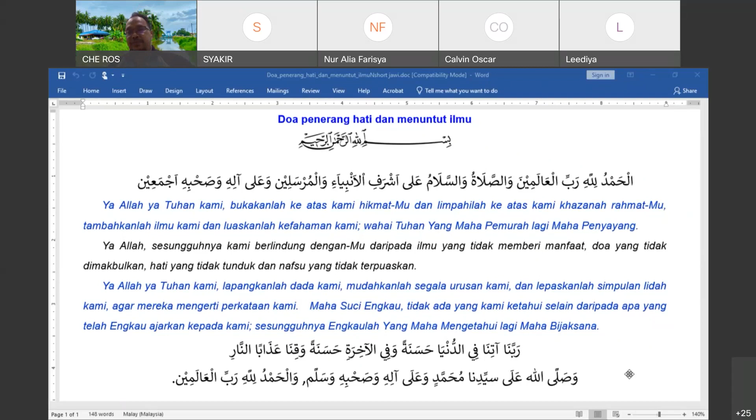Terima kasih, Syakir. Okay, Allah, kita share. Okay,

As usual, three quotations. Any takers? Okay, anybody? I want to take the first quote, Doctor. Naszrin the first, okay. Okay, siapa? Vivienne, I'll take the third quote. Vivienne, third one. Yes. Assalamualaikum, Doctor. Yes. Yeah, I'll take the second quote. Okay, Abdullah, second quote. Okay, go ahead, Naszrin.

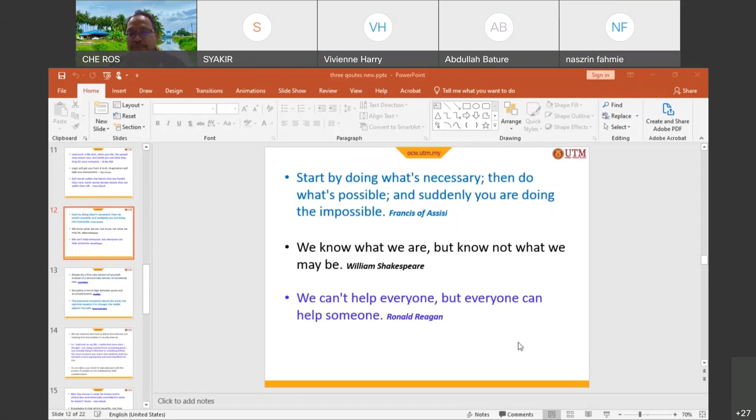Hello, Assalamualaikum. Waalaikumsalam. Okay, so the first quote is: start by doing what's necessary, then do what's possible, and suddenly you are doing the impossible. From my understanding of this quote, if you want to reach a destination, sometimes you don't see your path, but you can see the next step. So in order to reach your destination, just proceed to your next step, and after a while, you'll see that each step that you take leads you into doing something that you thought was impossible. Okay, that's all for me.

Okay, thank you, Naszrin. Okay, next, Abdullah. Okay, Doctor. So my quote is by William Shakespeare. It says, "We know what we are, but know not what we may be." And what I think this quote is trying to say is that we do not know what the future holds. So at a point in time, we may see ourselves to be not where we are supposed to be. Like we haven't reached a goal, or our personality is not what we want it to be, or where we are in life, we feel like we're not there yet.

And the thing is, that's true, because at this moment we only know what we can do, but in the future, we don't know what we are going to be. I think the quote is trying to tell us to always keep a positive mind and have an optimistic mindset for the future, because we never know what the future holds. Only God knows, and good things can always happen. Thank you. Okay, thank you, Abdullah.

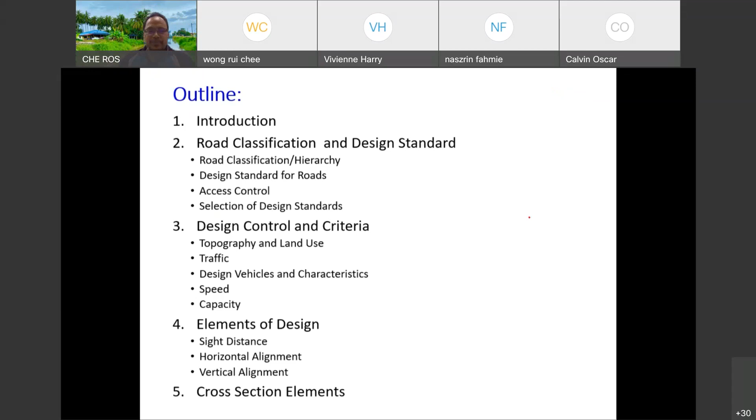Why must we follow the standard code of practice in the design? Why must we have ATJ, arahan teknik jalan, that you have to follow? First, we want everything to be standardized to provide uniformity in the design. Meaning that if you are in Johor, if you are in Pahang, if you are in Perlis, if you are driving on an R4 road, the quality in terms of the lane width, the maximum super elevation, the shoulder width, all these things should be standard.

And then, to provide consistent, safe, and reliable road facilities for traffic movement. Since we set the minimum standard, that minimum standard should already provide us safe and reliable road facilities if you use it properly. For example, if the speed limit is 90 and you are doing 90, then you'll be fine. But if the speed limit is 90 and you are doing 140, then you are taking the risk. You are doing it at your own risk.

And then, to provide a guide for less subjective decisions on road design. So if you have something and you ask, how should I design this? Then you can refer to ATJ, because it will guide you on what to do, what needs to be there, what is the requirement, and then you just follow it.

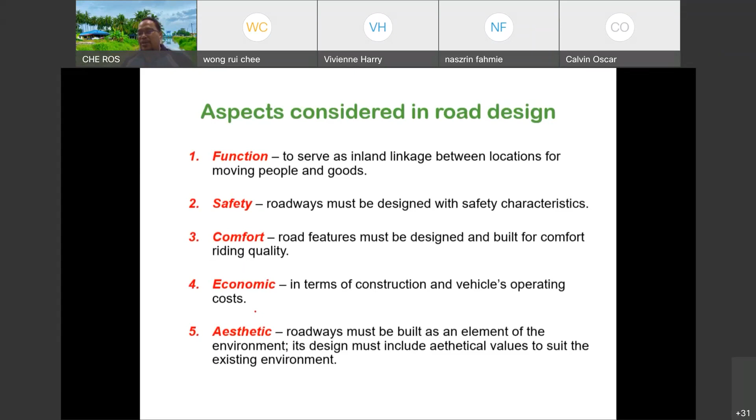And then aesthetic. The road should be pleasant. When you view it, it will be a pleasant view for you. So if you are good in blending the road with the environment, then it will be much better. Even though aesthetic is not so-called a function, if it doesn't look good, nothing happens, but it is going to be much better if it is a pleasant view, so when you drive through it, you enjoy the scenery. I try to do that, because most of our roads cross through forest or uninhabited land. If you design it correctly, nicely, it will be very nice, and your travel is going to be very enjoyable. So keep that in mind when you do the design.

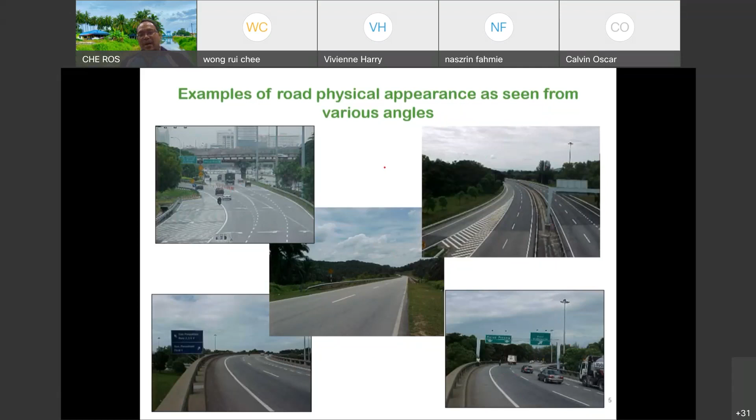Remember, your vehicle emits not just carbon monoxide and everything, it also emits heat. And if it's confined in that tunnel, it's going to be hot. So this is a very nice design for me.

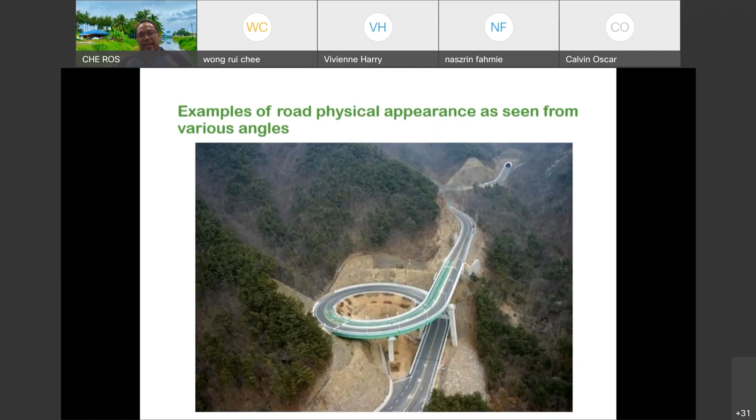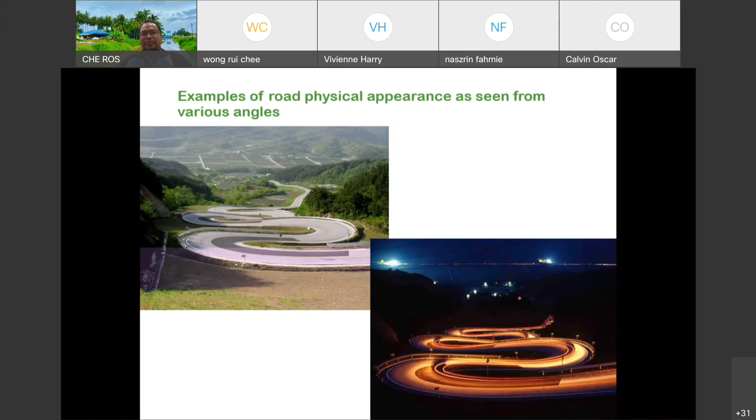In Malaysian JPJ, you have the test on Naik Bukit, where you will be considered failed when your car goes backward. As you can see, this is the snapshot at night - it looks very nice. You can make it good.

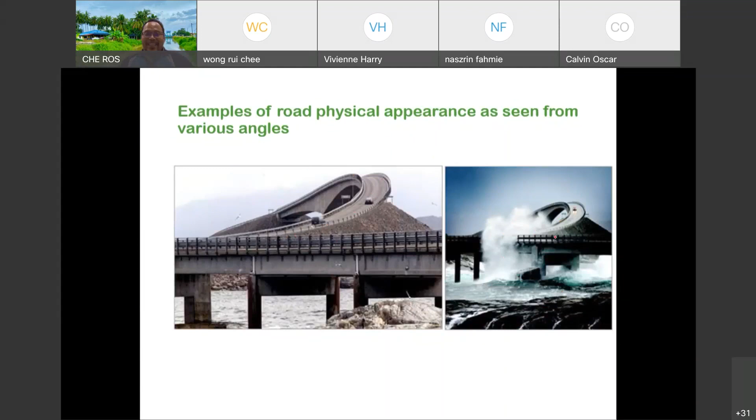And even this one - see, they just designed it in such a very interesting way. It's much more interesting when the tide rises and it just goes over the road. That's quite challenging. And this one, for example, you could just go through directly over there, but instead they made it a circle so you can enjoy more, looking at this water flowing for a longer period of time.

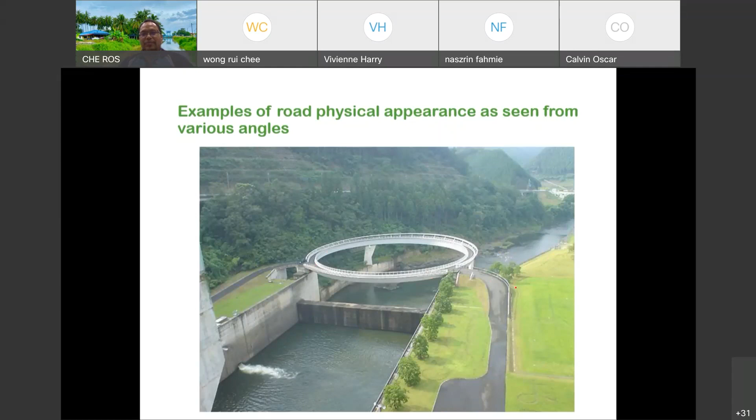I am not sure if you'd get lost in this - what's it called, how many levels are there? 1, 2, 3, 4 or 5 levels of road. You might get lost in this interchange. This is at Hachio - how do you pronounce that - Hisashimichi interchange at Hachioji, Japan, or whatever.

So we can have this - see, they have 2 tunnels there, and this tunnel is connected by all these curves. Then you come out - how do Japanese drive? It's like this, so you can come out here and go around, go down, and maybe somehow you can climb back to this tunnel, going that way.

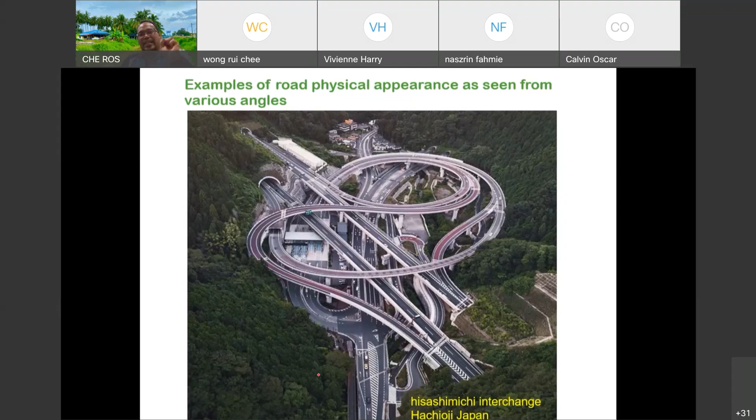Road classification and design standard. Road classification or hierarchy - it is important for us to define the hierarchy, because this hierarchy or design standard will have specific standards or specifications for certain types of road.

We know that our road network includes the national network, the state network, the town network, and so on. It goes from our federal road, expressway, down to state road, then down to local authority road, and down to jalan kampung and pejabat daerah. These are the functions of the road, connecting either from the city center or connecting intercity within that state, or even small villages. So we design our road according to their function.

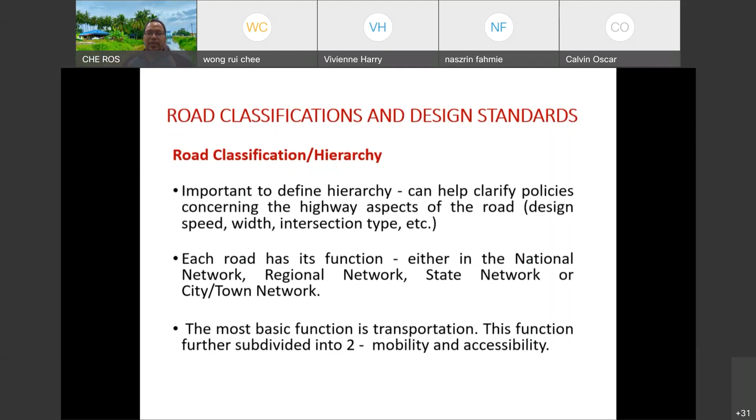So we set the hierarchy based on function, and in transportation, the basic two functions are mobility and accessibility - your ability to move and your ability to get access to a certain area. But mobility and accessibility are like yin and yang - you have to compromise one to get the other. For example, if you look at this top one, the arterial or expressway, you have high mobility, meaning your speed is going to be very high.

But it is lack of accessibility. So all our expressways, for example, are grade separated interchanges. Not intersection, interchange. It does not intersect, it just interchanges. Grade separated. We do not have at-grade intersections for our expressways, for example.

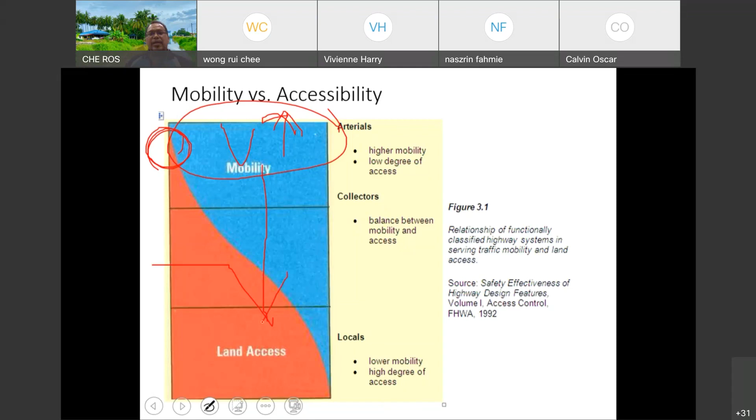And then as we go down to the lower hierarchy roads, for example, this is a state road somewhere here, this collector there, and then when you go to local roads, Jalan Kampung and so on, you have a very high accessibility. You can access anywhere. You can go down to any house. But what do you compromise? You compromise your speed. The speed may be just 30 km per hour for that particular road, 35 km per hour. But the accessibility is high. So when your speed is low, then your mobility is low.

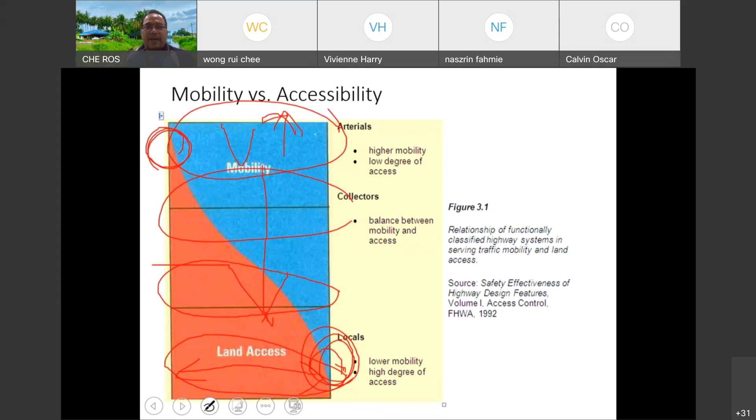Road category. There are two groups: we have urban and rural. So the question is, on what basis do we categorize a road as rural or urban? How can we say this is a rural road? Why do you call this an urban road? What makes you call it an urban road? So how do you define rural and urban? That's for you to find out.

So we have urban and rural, and for rural we have 5 categories of road, and for urban we have 4. We start with the highest, which is the expressway. Of course in Malaysia, for the expressway we need to pay tolls, except I believe in East Malaysia, Sabah and Sarawak, they have the better hand. Why? Because the expressway is free, I believe, going to be free. I'm not sure. The Pan Borneo is going to be free. We have the expressway, we have the arterial, we have the collector, and we have the local street.

So if you start from your house, that is the local street in front of your house, and then you're going to the jalan besar. For example, this is Jalan Kebangsaan 20. That is your local street. And then you go to Jalan Kebangsaan. And then you go to Jalan Pontian. And then you go to the North-South Expressway, E2. E2 that goes through the city center, that is the urban expressway.

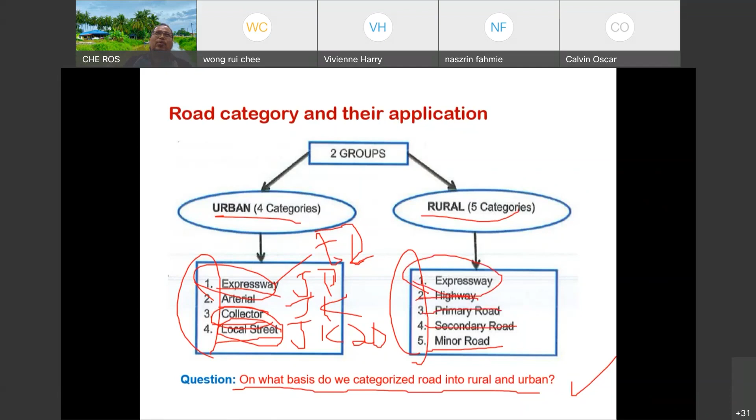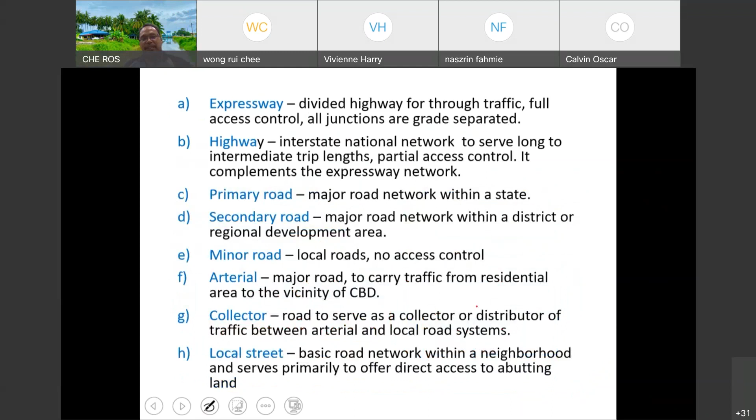And for rural, you come out from your house, and then you go to a bigger road connecting to another pekan kecil, and then you go to bandar-bandar, you go to another city, and then you jump onto the expressway. That's the hierarchy going from small going up, and it is like a tree. We have the small branches going to the trunk. So the trunk is the expressway there. So this is the explanation of the expressway, collector and whatever.

And then, another task for you. Allahu Akbar. Read pages 3 to 7 in ATJ. So please share if you find the ATJ. Share them in e-learning. I'm not sure whether somebody has shared it in our forum.

Now as for the characteristics of these roads, the expressway is designed for long trips. Design volume is high and the speed is going to be high. As we go down, the minor road is going to be for short trips, and the volume is going to be low and the speed is going to be low. That's how it goes down. So it does in urban areas. The same thing goes. The expressway is designed for long and medium trips, and it goes down to the local street just for the local area, to go from house to shop or whatever.

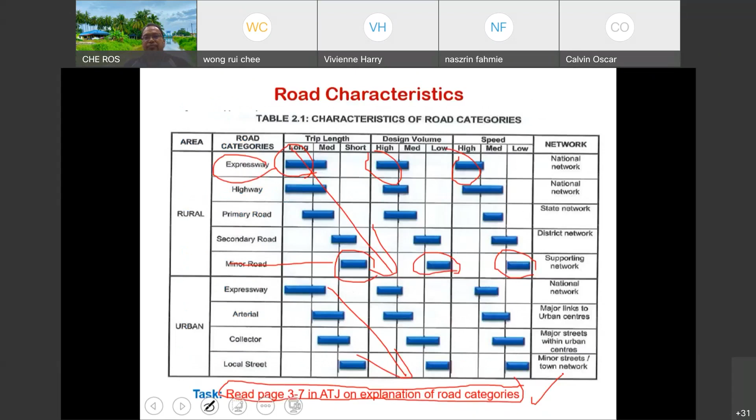The explanation of the road categories, I believe I gave you a short explanation, and you can find a lengthier and much more explanation in pages 3 to 7 in ATJ. And as for design, we use numbers. From number 6 going down to number 1. So 6 is the highest design, going down to the lowest of 1. And then we have R for rural area and U for urban area.

For example, let's say you are driving on an urban expressway, the speed limit is normally 90 km per hour. That's why when you drive through Seremban, it is 90 km per hour. And then until you get out from Sungai Buloh, then you start getting back 110. From Johor we go 110, and then I believe somewhere before Kajang, or somewhere at Kajang, it starts 90. Why? Because that's already urban. We are going from rural. And then it goes down until you have R1, U1, where the speed is less than 40 km per hour.

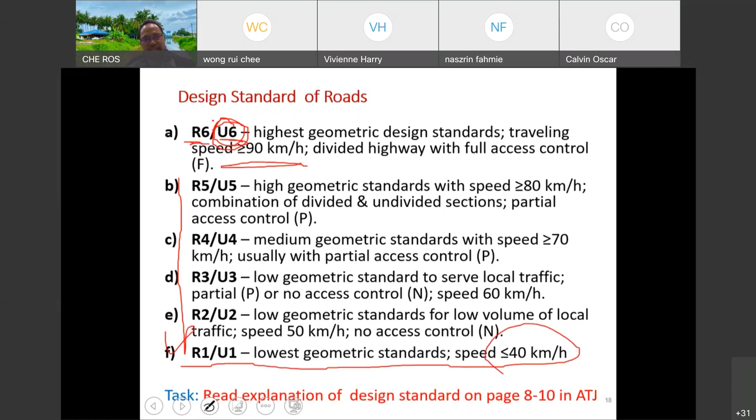So in your IDP later, you need to identify first: is your road rural or urban, and what is the number of your road, R1, R2, R4, or U2, U3? Or maybe you have a combination. Let's say your development area is designed as U, and then when you go out from your development area, you are tapping into the rural design road.

And then that rural design road, part of it is going to be urban later when it reaches the city center. So one stretch of road can be either rural or urban, depending on the area that the road crosses. Okay, 8 to 10. Read further on the explanation of the design standard.

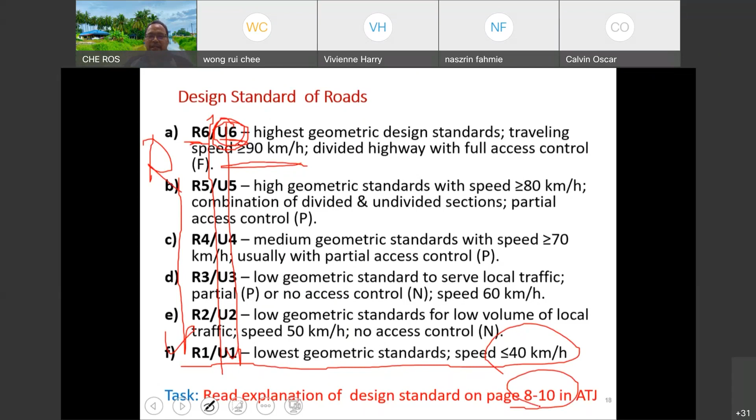In terms of access control, an expressway is fully access controlled, meaning that you cannot tap the expressway. You have to have permission to make any exit or any entrance to the expressway. And it goes down to partial, and then when you have the local street, there's no control on the access. You can make whatever access you want. For partial, maybe they say that intersections should be spaced at least 400

meters. So if in your design you're going to tap the road, you have to check how far the adjacent intersection is from the intersection you are trying to construct. If the distance required is at least 400 meters and when you check it is only 300 meters, you cannot construct the intersection at that point. Why? Because the requirement says it is at least 400. So even if you submit your drawing, it will not be approved. That's talking about IDP 2 later.

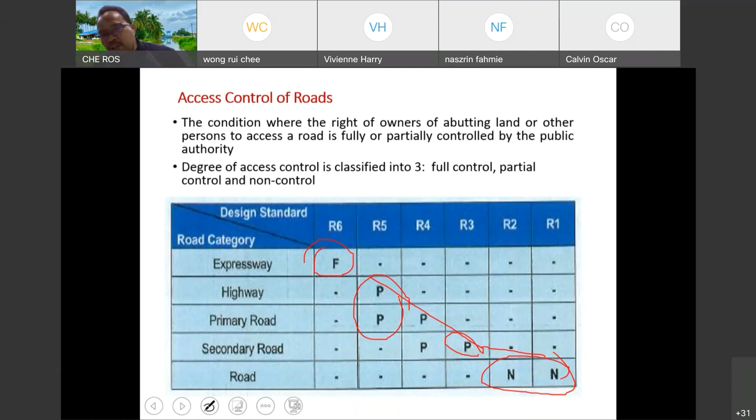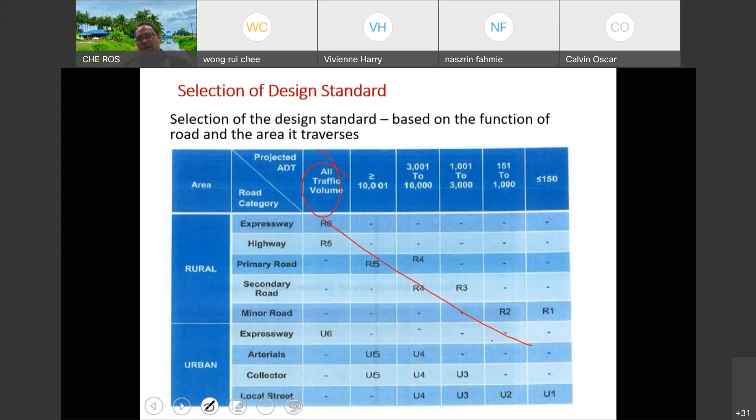And the design for the traffic volume, of course, high volume going down to lower volume. This is how you select the design standard. As I said, in IDP later, you're going to do the same thing with your IDP. You identify your project. That's why I ask you where your project is located. And then check where that road passes through. Does that road pass through a rural or urban area? If it's urban, then it's going to be U. And then is that U3, U4, U5, U6 or whatever?

So check your ADT, and this ADT will give you the number that you are looking for. And then when you get that, you go with the route location. But in your IDP, your route has been predetermined for you. You just use whatever alignment they give. And when you determine the route location later, you're going to ask the surveyor to go and survey and peg all this, and you're going to design your road based on that alignment. So we are looking at the design part. This is the step to get to our design part.

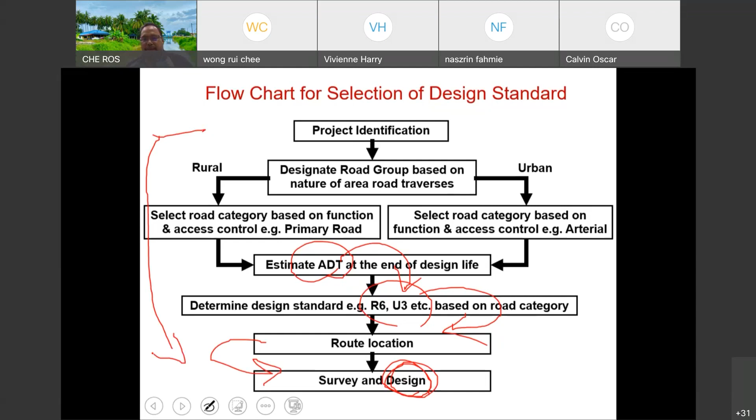Design control and criteria. What are the criteria that will govern our geometric design? First of all, topography. That is why in your IDP you were given a topo map that has the contour lines and the contour values. And I believe in IDP 1, what you did is the earthwork. You cut your area into certain platform levels, and you're going to use the same platform level in your IDP 2, where all the design will be based on your earthwork. That's why earthwork is very important.

You need to cut that area, fill that area, or whatever you need to do there with the road design, the drainage design, the sewerage design, the water reticulation design in mind. It's easy for us to just cut it flat. But when you cut it flat, just imagine how you're going to design your drain, because your drain needs to be at a certain slope. How are you going to design your sewerage pipe if it is flat? How deep are you going to bury your sewerage pipe?

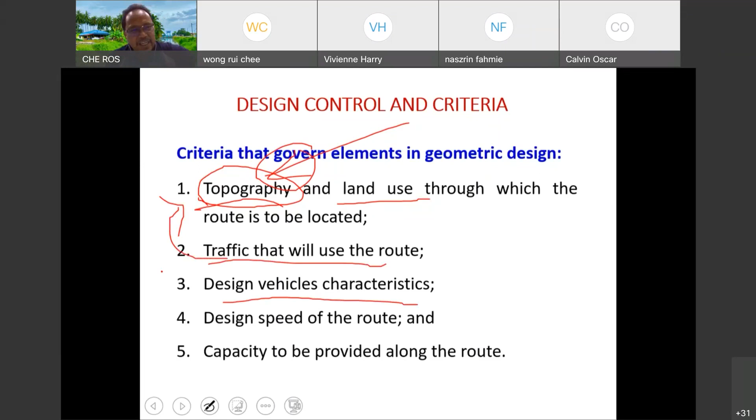And the traffic that uses that route, I already explained that in topography just now. Meaning, what kind of vehicle is going to use your route, the design vehicle characteristic again. Traffic is not just the type of vehicle, it is also the volume. How many vehicles are going to use that route? So you're going to design it either 2-lane, 3-lane, depending.

For example, in your IDP, I believe your main road going to your residential area is already a 4-lane divided road. You got the K22, the divided 2-lane each direction. The design vehicle characteristic will affect your geometric design in terms of turning radius, minimum radius, and the width of your lane. And let's say if you're going through a rural or urban area, the intersection: how big is the radius of the intersection, will you allow trucks to make a U-turn or whatever?

And then the design speed, of course, we have the specified design speed. For example, the expressway should not be less than 90 km per hour. The top speed is going to be 110 km per hour. So if your expressway passes through a rural area, the speed is going to be 110. But if your expressway passes through an urban area, the speed is going to be 90. And as it goes down to the road in front of your house, Jalan Perumahan, what is the speed over there? It's going to be low speed, normally 35, normally below 40.

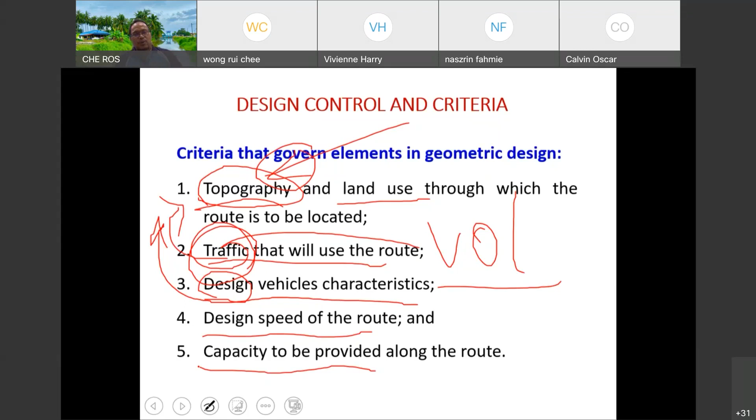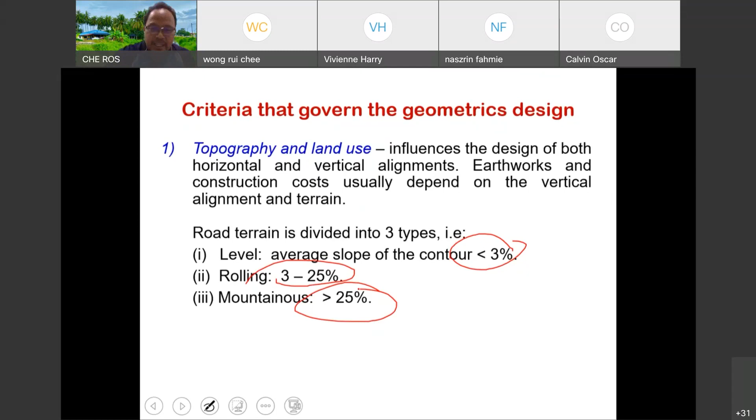I already explained topography and land use. The topography can be divided into 3 based on the average contour. If less than 3, it's considered level. 3 to 25, it is considered rolling, and if more than 25, it is mountainous. So check, for example, your IDP: what is the average slope of your area, and then you know the terrain type of your area. And these different terrain types will give you different speed requirements.

And then traffic: the ADT, the design hourly volume. You're going to use this in your IDP later. Design hourly volume ratio, and then the peak period, if it is critical for the peak period. Then directional distribution: we might not have a 50-50 split.

That road may be split 60-40, for example, 60 going northbound and 40 going southbound. The traffic composition, percentage of motorcycle, percentage of motor car, percentage of heavy lorries, and you need to do the traffic projection for 20 years.

Previously, if you already took highway engineering in the design of our pavement, if you are using the old design, which is 5/85, the design period is 10 years. But when you use 5/85 revision 2013, the design life is 20 years.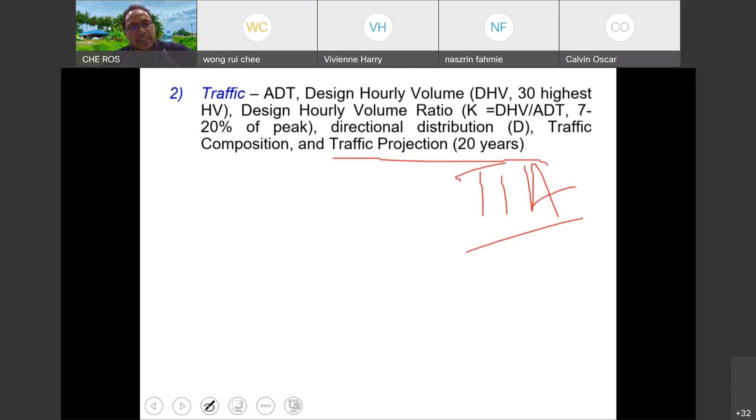That's why we need to do the TIA, traffic impact assessment. And that traffic impact assessment guy should be well versed about his projection, how to project.

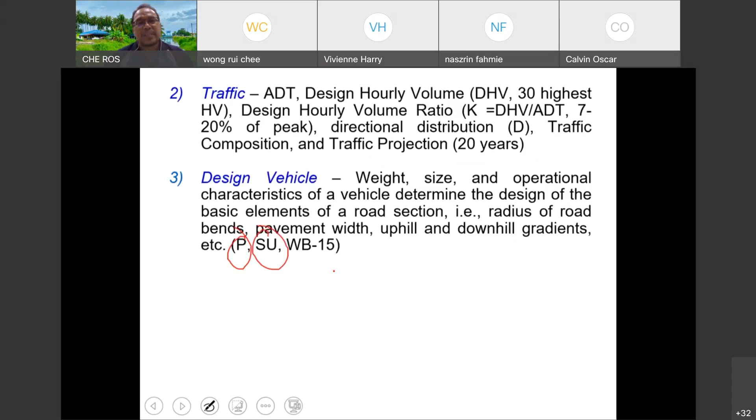And then the design vehicle, as I said, we have the passenger car, we have the single unit, and we have the wheelbase 15. All those have different turning radius, different weight, different width, different height, different power ratio, different braking system, and it will affect your gradient, it will affect your pavement width, it will affect your radius.

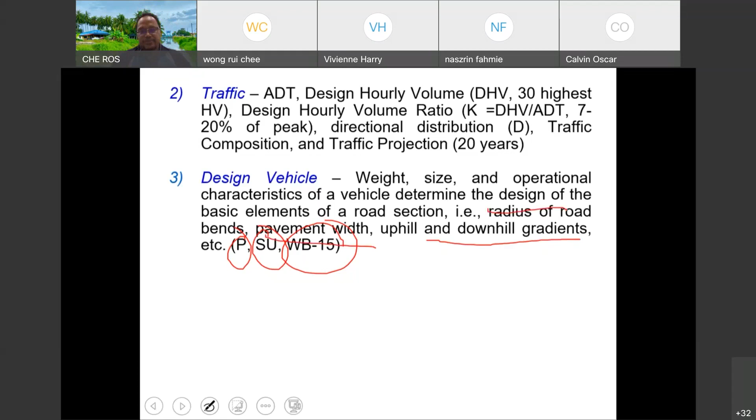Speed. Normally, when we're talking about designing the road, speed is not just something—speed is the element that we need to put heavily for consideration. As I said, for urban road, rural road, expressway, we put the speed limit of 110. So that 110 is our speed limit, but our design speed is 120.

If you are driving on the expressway, bear in mind the speed that we design for it is 120 km per hour. So if you exceed the speed, you are taking the risk. We are not saying it is not safe, but you are taking the risk, because we design the road for the stopping sight distance, for whatever skid resistance, all based on 120.

So if you are doing, let's say 180, that means you are going to take a longer distance to stop. You need a longer sight line to pass any vehicle on the road. So be careful, do not overspeed. If you are doing 120, I believe still okay, maybe 130 still okay, but if you are doing 180, 200, be careful, because we did not design the road for that speed.

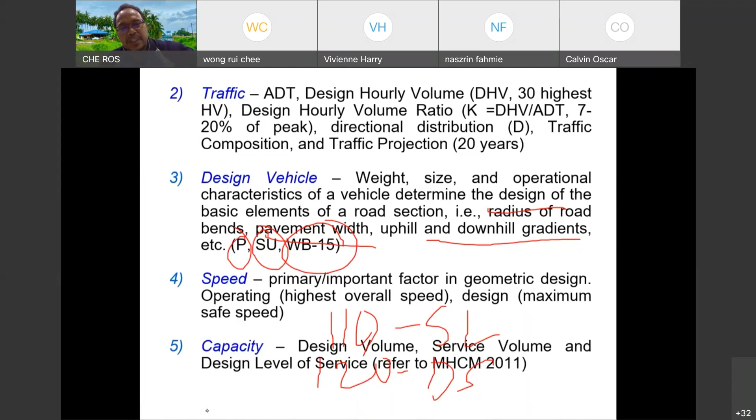And then the capacity, as I mentioned before, the capacity of our expressway, for example in Johor, cannot handle the volume, the demand anymore. For service volume, for each type of road, and the design level of service for each type of road, you can refer to Malaysian Highway Capacity Manual, MHCM. Some even put the extract in ATJ, but the actual explanation, everything is in the Malaysian Highway Capacity Manual.

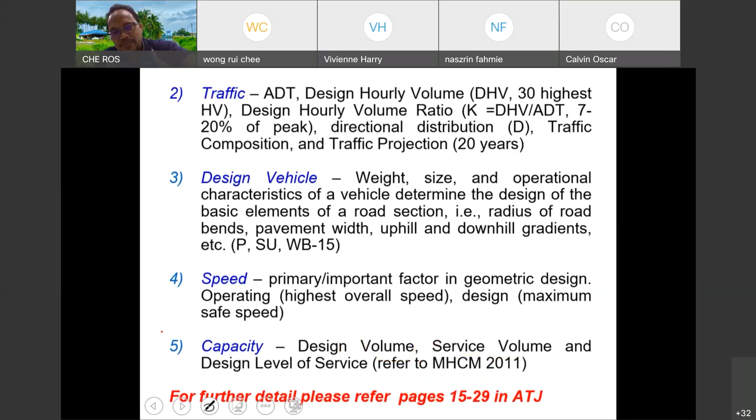Another reading, a lot of reading you need to do. For further detail of this, all these things, the topography, all up to capacity, just refer page 15 to 29 in Arahan Teknik Jalan for the explanation.

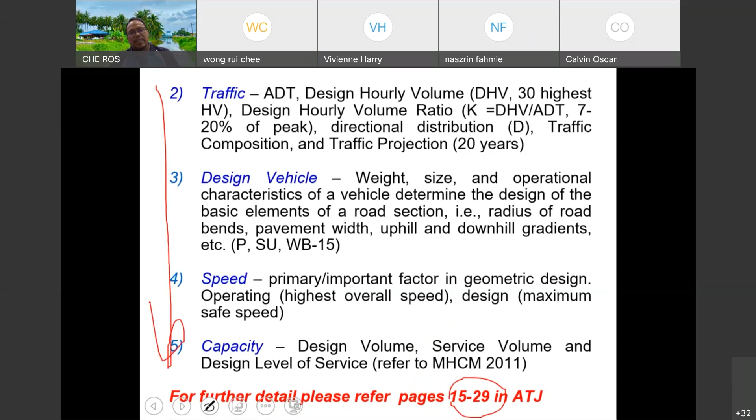What is turning radius? We are talking about turning radius, turning radius, turning radius. What is turning radius? How do we determine, how do we check for turning radius? For example, this is a trailer, maybe WB 15.

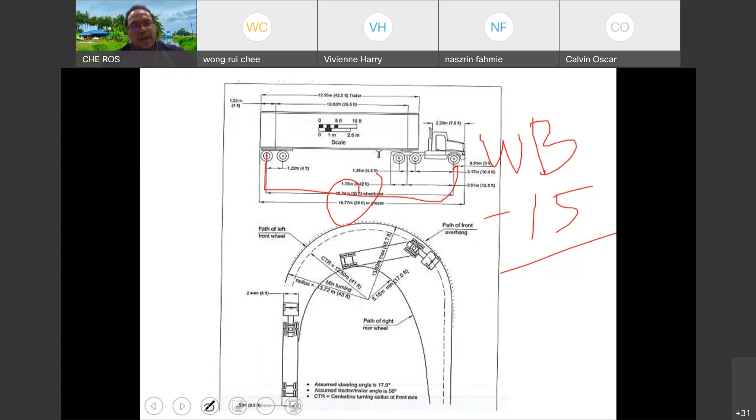Let's check. Base to base, that is 15.2. Yes, that is WB 15. That's how we determine the WB, wheelbase, the distance, the longest distance of the base, the wheel, between the wheels. That is 15 meters. So this is WB 15.

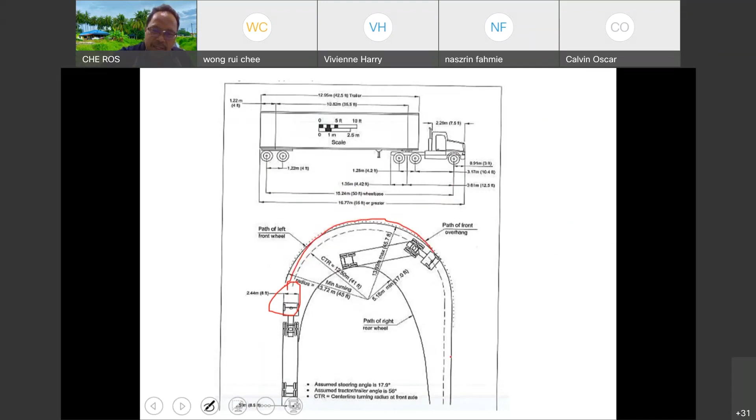Let's look at how WB 15 makes the turn. This is the front, the cockpit—the cockpit or the front goes outside. But what happened to the tail? The tail goes inside. So this is the extra width that you need to have.

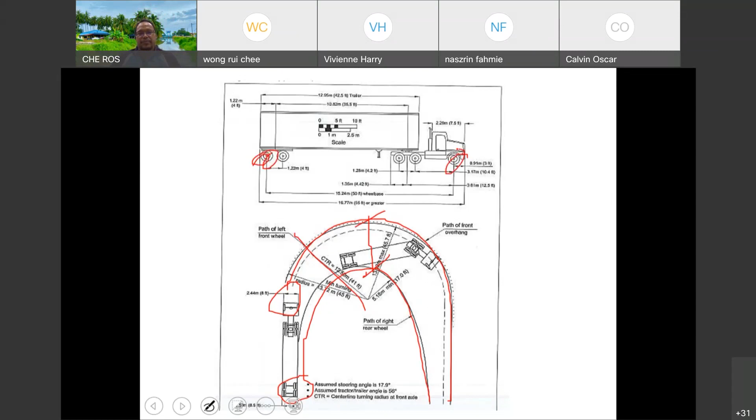And then that is the radius, the path taken by our wheel. So, for example, roughly 14—this is 14, 13.72. If you did not have a radius of almost 15 meters, do not allow the truck to make a U-turn, because it needs that much turning radius.

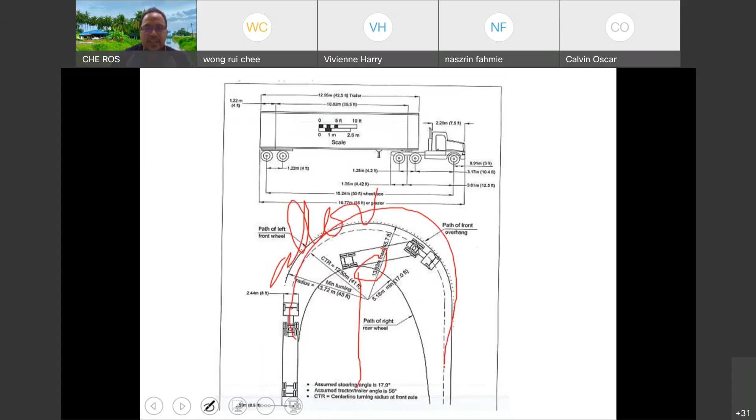That's the design vehicle, and all these tables are in Arahan Teknik Jalan, for passenger car, for single unit, and for WB 15. It gives the overhang, the length, the width, the height, and even the turning radius there.

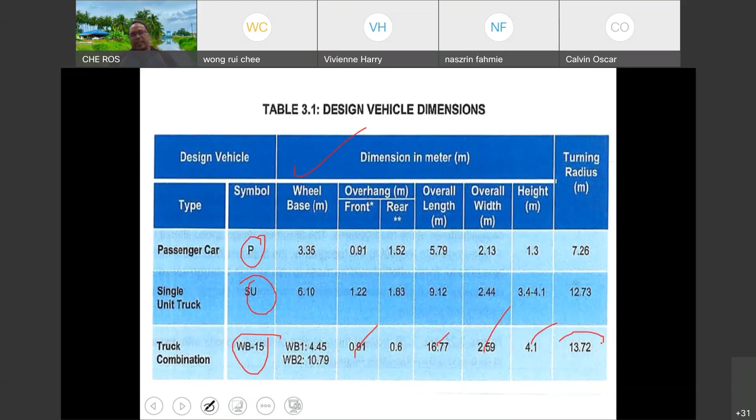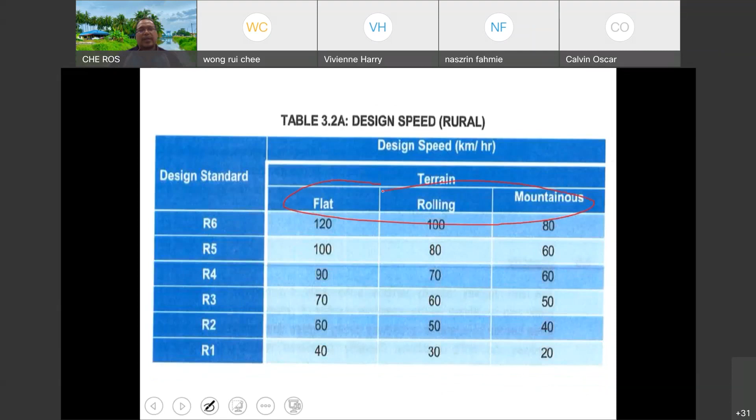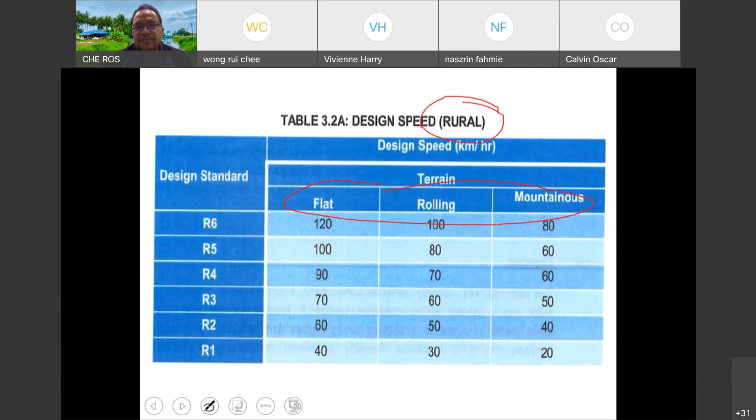And then the design speed for different types of topography—I give you in this table that is for rural, so for urban it's going to be a different requirement. The design level of service, again for rural: the minimum for expressway is C, and then we can still tolerate the minor road down to E.

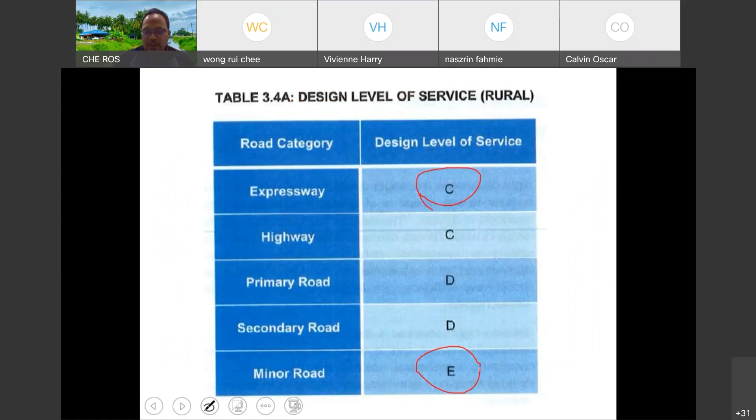Any question? Any question at all on this part before we go into the element, and then the element will involve calculation? Any question?

So you're gonna have one, let me draw. So you're gonna have one road going like that, one road going like this, intersect, and then you go down here, another intersects there. Another one intersect there. Now you are going to make your road going like that, okay, and then maybe like that, and then going like that.

That is your road. So when you connect the roads which intersect at certain level, for horizontal you connect the road at certain position or certain coordinate. This you are connecting at certain level, then you're gonna have your road like this. And this is no longer your road. That is vertical alignment.

And vertical alignment can only be seen from the side view. Horizontal, you need to look from the top, and vertical, you need to look from the side. That's vertical alignment. And then the cross-section element.

Make sure I don't want this answer from you. When I said, how many right of way do we have, and I said right of way, don't ask me what is right of way. Because when you draw the cross-section element, you have to know your right of way. You have, for example, the drain, the shoulder, and then your road surface, and then the shoulder, and then the drain, or in between the shoulder you're going to have a footpath there.

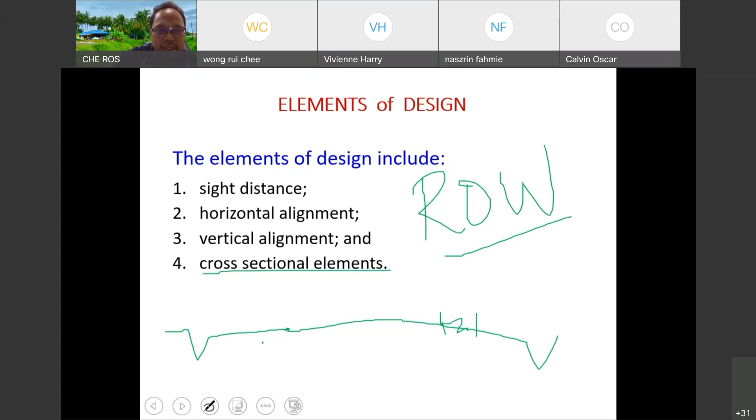This is the center line of your pavement, and that is your drain. That is cross section. So if the right of way is this whole width, that is right of way, including whatever. If you are talking about expressway, it is from the green fence here to another green fence there. That is the right of way of the expressway. But the right of way of the normal road, there is no obvious point where it ends. We know for expressway it ends at the fence.

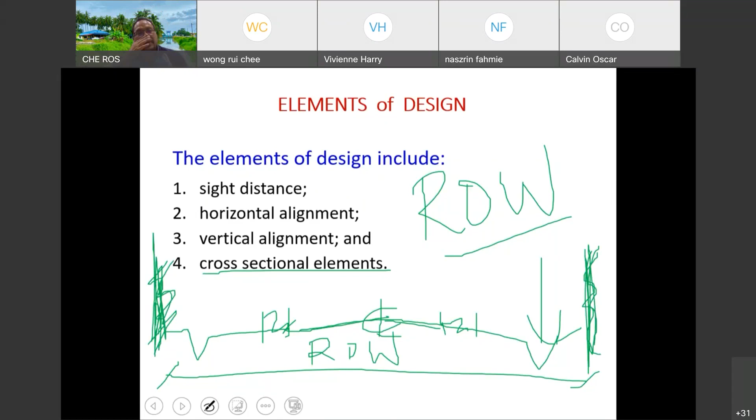What is sight distance? Sight distance is the length of road visible to drivers. For example, if you are here, you are driving on this lane, you are on this lane. How far ahead that you can see over there? If the car is somewhere there, you may be able to see it. So this is your sight distance, how far in front of you that you can see. That's the sight distance.

We should have ample sight distance to avoid obstacles. Let's say there's a dead dog there being run over by a trailer, that's an obstacle on the road. So we should have enough sight distance to avoid that obstacle. That is why some of you just run through the carcass of whatever animal being hit on the road. Why? Because you don't have enough distance to avoid, to detour from that carcass, and you just hit them. To avoid the obstacle, and the most important is to overtake.

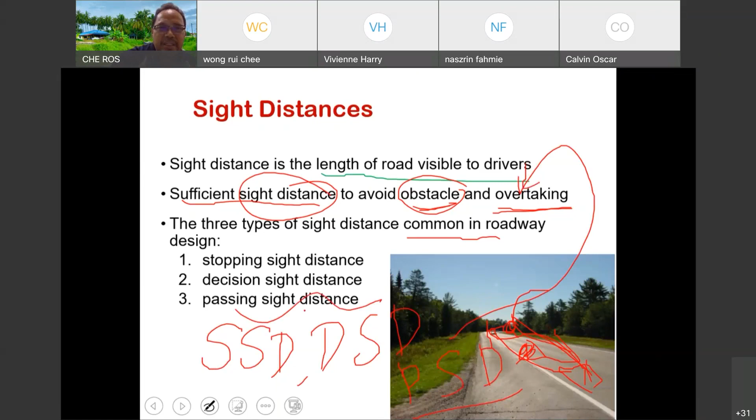Passing sight distance is for that overtaking. Stopping sight distance and decision sight distance, that is normally to avoid the obstacle.

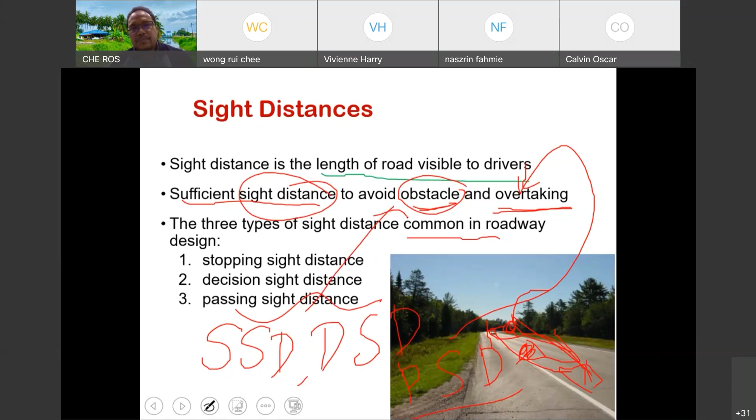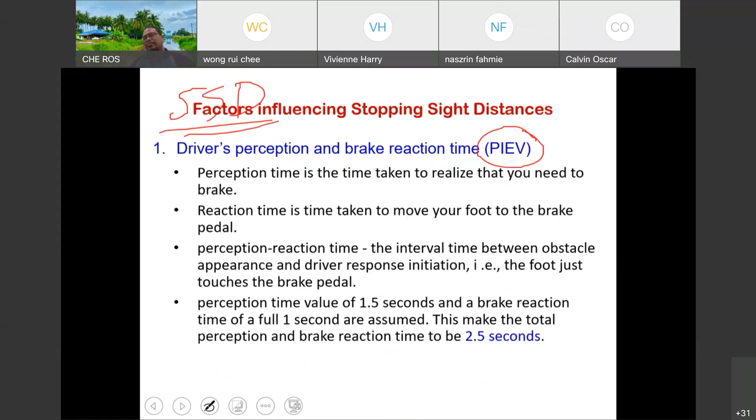Let's look at factors influencing your stopping sight distance, or simply said SSD. First, hopefully you still remember the PIEV - the driver's perception and reaction before he or she steps on the brake. That's his PIEV.

I believe you have gone through P, and I believe that is also the answer to question 1, the road user factor of a road user. Perception - you are looking, you see that obstacle, that's perception. And then intellection - you identify, oh, there's a cat. And then what to do? Emotion - if there's a cat on the road, what should I do? And then volition is doing it.

So, as usual, the PIEV will be affected by drugs, sleepiness, or whatever, and it will also be affected by experience. That is why the experienced driver, they rarely get into an accident.

So the reaction time is the time for you to move your foot from your gas pedal to your brake pedal. Perception reaction time depends on people, depends on lighting - is it night or day, depends on your headlight, depends on your sobriety, depends on the situation - is it complex? Perception time normally 1.5 to 3, even 3.

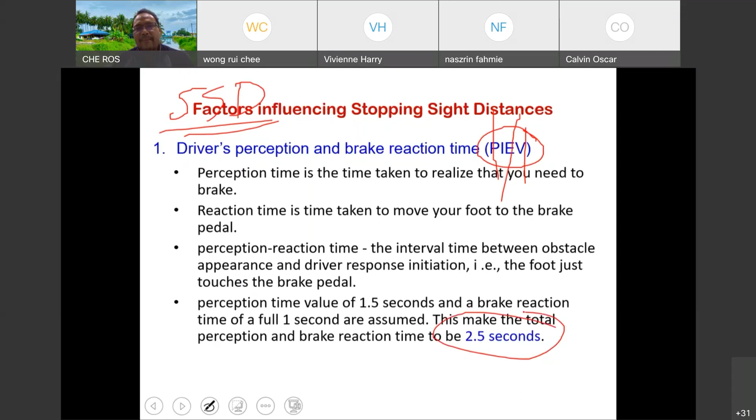And normally we consider for you to take your foot from your gas pedal to your brake pedal, 2.5 seconds. Normally range from some even just 1 second, but some do drag until 10 seconds. Okay, that is the first one, PIEV.

The second one is your vehicle's ability to decelerate and to accelerate. So let's say if you want to buy a car, if you are the kind of guy that likes to drive a fast car, normally you will ask, how long does it take to go from 0 to 100? That's the question they ask for supercars - what is the time to accelerate from 0 to 100?

So some say, okay, 4 seconds - yes, that's good, 4 seconds. And then another car says just 3 seconds. Then you will make your choice on that kind of car if you had money. I don't know, so we're just talking about the guy with money there.

When we are talking about deceleration and acceleration, it is important. Why? Because if, for example, your deceleration rate is good, then you might be able to avoid the obstacle. And even if your acceleration rate is good, you might be able to avoid the obstacle. So your speed actually determines how far you will go before you hit or avoid that obstacle.

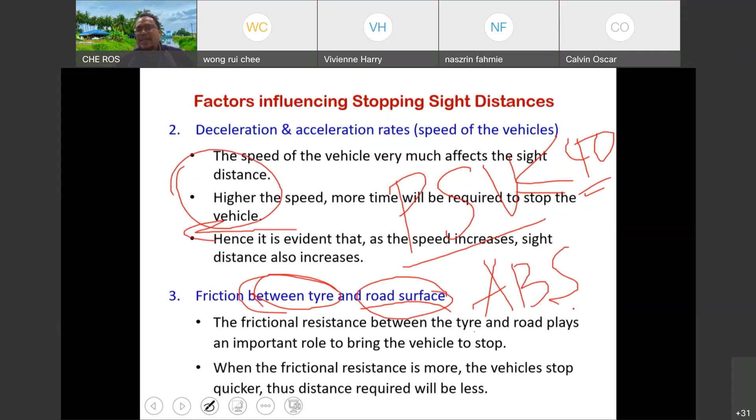And why is ABS important? When you buy a car, some cars have ABS, some don't. Some motorcycles have ABS, some don't. What is ABS?

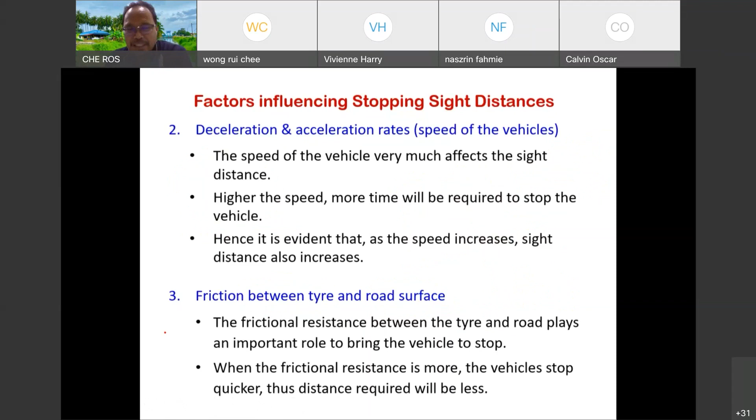Anti-lock brake system. A stands for anti-lock. Anti-lock braking system, meaning that your tire will not be locked when you brake.

Okay, this is your tire. When you brake, your tire will stop. And what happens? Your tire will slide, just slide until it comes to a stop. That is when your tire is locked.

During this, let's say your car is here and the obstacle is there. When you brake, you just slide through and go to that obstacle. That is when your tire is locked.

I experienced this when I drove my Proton Saga FLX, which doesn't have ABS. At that time I was driving from my hometown, going just before Ipoh Changkat Jering, close to the area where they produce cement, I believe a cement factory at the side of the road. And then it started raining.

And then the car started braking. So I braked and my car just slid straight toward the car in front of me. At that moment, the speed was quite high, I believe around 70 or 80. And what happened? My car just slid.

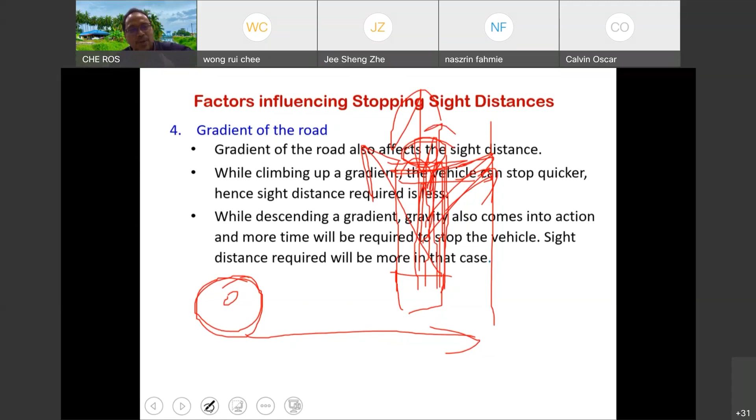So with ABS, what happens is: this is your car tire. When you brake and your tire starts to lock, the brake will release so the tire can move. Then when it tries to lock again, the brake releases again and the tire moves. That's why it's called anti-lock—your tire will not be locked.

So if your tire is not locked, you can steer your car. When your tire is locked, you cannot steer—your tire will not follow where you steer your car.

With anti-lock, some people who haven't driven an ABS car before may think the brake isn't working properly, because when you brake, the car jerks—it doesn't stop smoothly, it keeps jerking, brake jerk, brake jerk, brake jerk. That is the anti-lock braking system.

And it is actually good for you. The distance to stop when you have ABS is much less, because your tire doesn't slide, so it uses the full friction between the tire and the surface.

Now we've had an automotive class. So let's go back to our traffic class—that was the automotive class for a moment. Any more to add?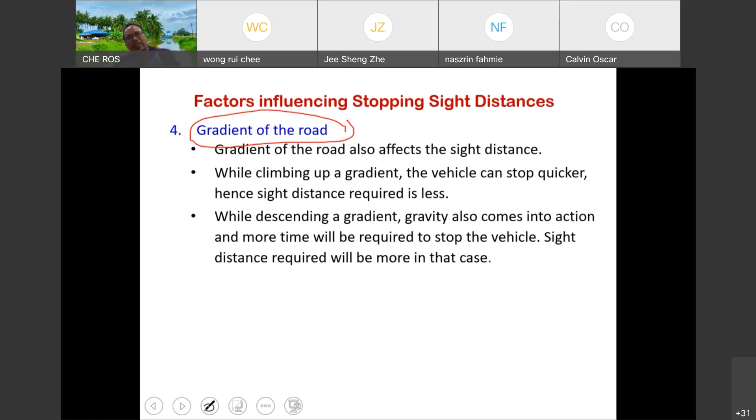So the gradient also affects the sight distance. You need a longer sight distance when you go downhill because gravity keeps pulling your car down. Okay, so when climbing, of course, your car can stop much quicker. Okay.

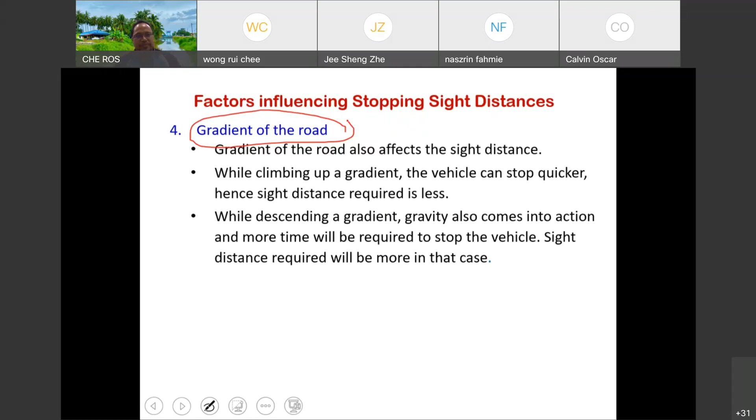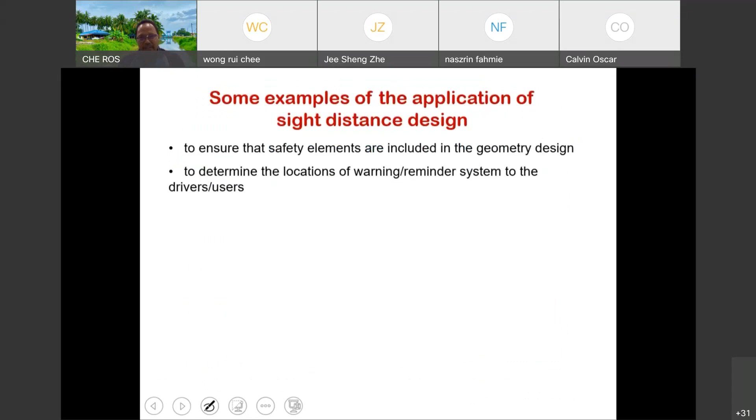Is it okay? Let's. Oh, we still have 10 minutes. Okay, inshallah we can do this.

Okay, now let's look at the first one, SSD, stopping sight distance. So stopping sight distance is the length required for you to stop the vehicle, from whatever speed you have to zero. Okay, your speed should be 0. So the SSD consists of two components, where D1 is the distance you travel during the PIEV, and D2 is when you step on your brake and your car slides or skids to stop.

Okay, so during the PIEV, your car is moving at whatever speed you are doing. That is why PIEV is very important, because it is directly related: V times T. Your speed, times whatever time it took for you to react to the condition. Okay, now let's look at this. The distance, if you can still remember physics, they call it D equal to UT. U is your speed, T is the time. That is the equation for the distance traversed during the PIEV. D equal to UT.

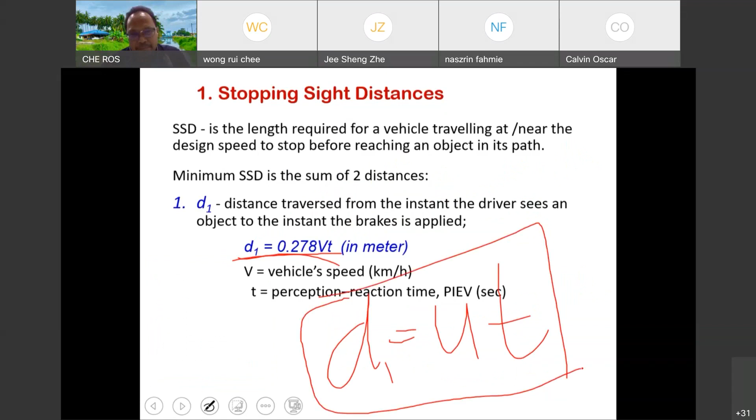You can try to convert it yourself, in fact. Even if I did not give you the equation here, you can still use D equal to UT. I just like my physics. I love physics actually. So if you're using this formula, you don't need to remember anything, because that's the basic formula of distance equal to speed multiplied by time. It's your choice anyway.

Okay, now D2. D2 is the distance for you to stop when you put your foot on the brake pedal. How far will it go? How far it will go will depend on your initial speed. It will depend on your final speed. So if you can stop, your final speed is going to be 0. But let's say if you hit that obstacle, your final speed is whatever speed you hit that obstacle at.

Okay, let's say you are doing 110, and then you saw a trailer brake in front of you, and of course the thing that goes through your mind: should I brake, should I avoid, should I blah blah blah. That is the first distance, the PIEV time. If your thinking time is too long, you might not even brake, you just hit the trailer.

But let's say your PIEV is short, and then you say, oh, I should brake, then you slam on the brake. You slam on the brake, and let's say the distance is too short for your car to stop. What will happen? You will hit that trailer and your car will stop. So the U is the speed that you hit that trailer. If you are talking about good, the U is 0, if you can stop in time.

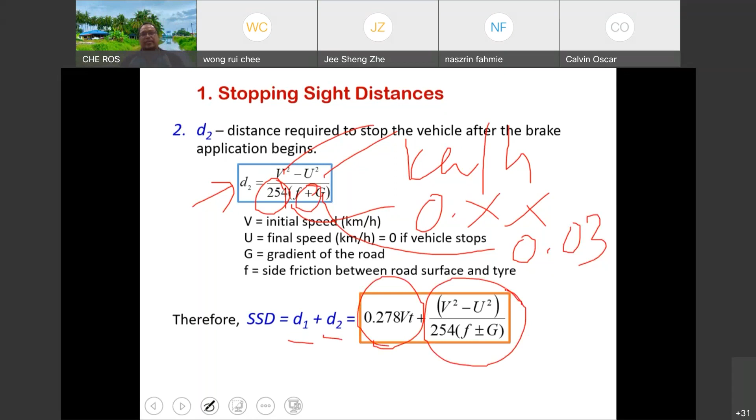Meaning that the stopping sight distance is D1 plus D2, which is the first component of PIEV, and the second component of the braking distance. That is the stopping sight distance. So this is where you saw the obstacle. This is the time that took you to think what to do. And then you start braking, and then inshallah you'll stop before you hit that, what is it, that stick man. So this is the total distance. This is D1. This is D2.

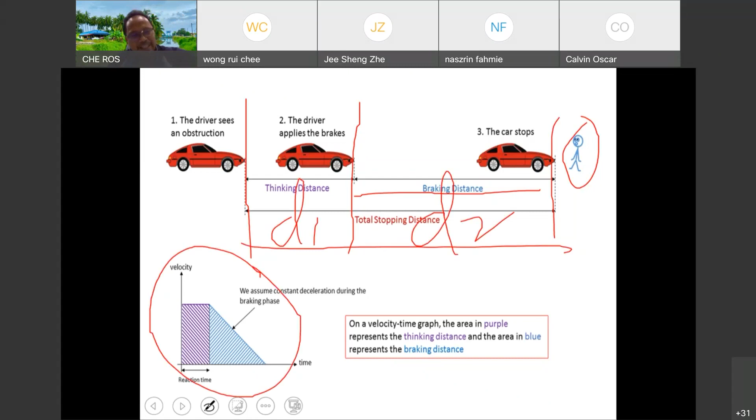And why did I put this figure down there? Because I love physics. So I want you to love physics. Physics is something that we need to use in our daily life. So this distance is shown by this area. Why? Because this is the speed that you are doing. During the PIEV time, your speed does not change. So this area is the distance that you traverse during the thinking. And then you drop down your speed until you reach 0. That is the braking. The area is the distance that you traverse.

So if you are talking about way back, I believe you learn this during your Form 4 and Form 5. I'm not sure. During my time, I learned it in Form 4 and Form 5. Maybe in your era, you learn it in Form 3, Form 1 or Form 2, because your education is much more advanced than during my time.

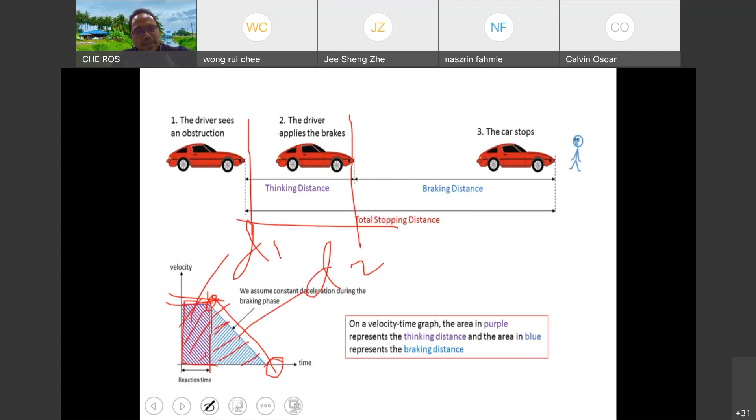Okay, any question? I believe we can stop there without going further to this question. Any question at all?

Now we are talking about safety. We are talking about braking. We are talking about your tire, how to check your tire. And bear in mind, not just the tire tread, it is also the tire pressure. Why? Because the tire pressure will affect the contact area. So the overinflated tire will take more time to stop compared to the underinflated tire. But do not say that underinflated tire is better, because with an underinflated tire, the wear and tear will be much faster. So inflate to the proper inflation.

How to check the proper inflation? Check at the driver's door. When you open the door, it is at the column between your front seat and your rear seat. It'll give you kPa and PSI. How to check the tire pressure for your motorcycle? It is at the chain cover of your motorcycle. Normally, it is there. Okay, any question?